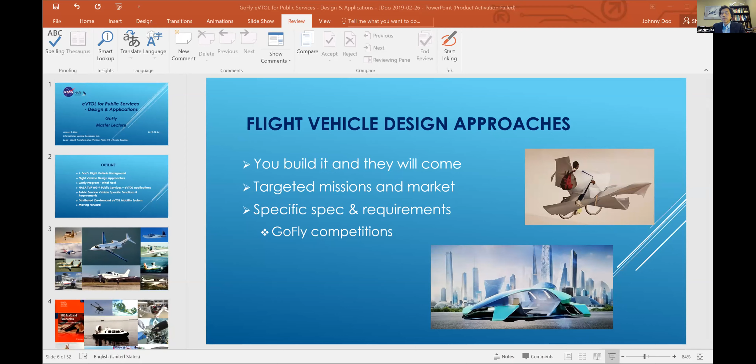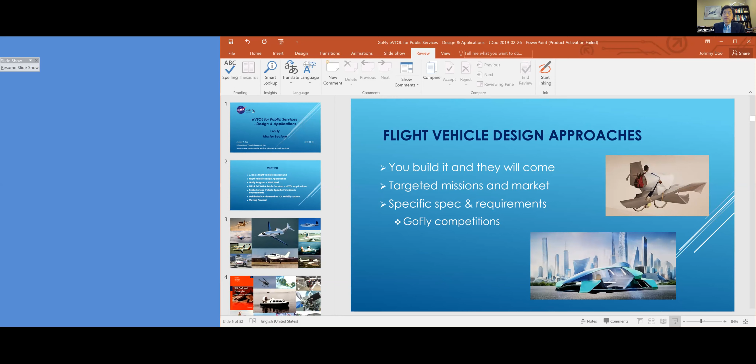And you guys can see the slide, okay? It looks like we're in presentation mode, Johnny, so if you'd like to switch it to full screen. On my side, it is full screen. Let me try another file, and put that on full screen. Not working? Almost there. Let's try full screen on this slide, and it should work. There we go. All right. Okay, yeah. All right, guys, and ladies.

Welcome. Today we're going to talk about the eVTOL for public services and design application. Appreciate the invitation, and I'm going to go through the slides a little bit quick. In case you have any questions, feel free to ask, and also feel free to contact me if you want certain specific details.

Let me quickly go through an outline. I'm going to talk a little bit about my vehicle background, thanks for the introduction already, and we're going to talk about the flight vehicle design approach, just a general approach, and what we're going to do with the Go Fly program. I'm sure there's a future program that probably follows, but you're already putting in a lot of effort that can be put to good use. I'm going to quickly introduce the NASA Transformative Vertical Flight Working Group for Public Services and its application. Then we get into public service vehicle specification, specific functions and requirements, and we can talk briefly about a distributed on-demand eVTOL mobility system concept. And finally, we'll briefly say what do we do moving forward.

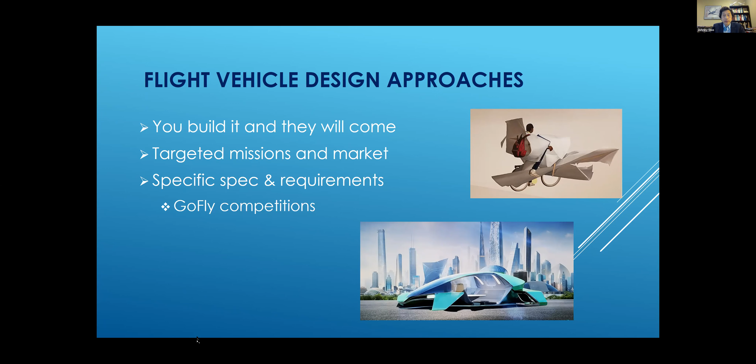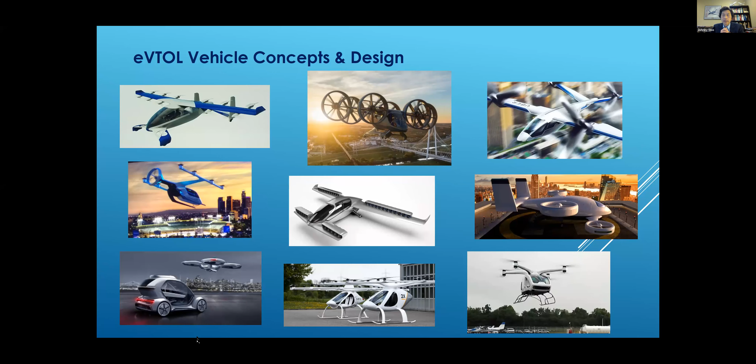Of course, we've all seen a lot of different designs, over 150, in addition to all the Go Fly projects that's ongoing right now. But they all have different features. It's very, very different. This is kind of breaking the tradition from the so-called conventional aircraft design, the fixed wing or the helicopter. Right now, everyone has different ideas for what will work best. And I'm sure there are many different ways to address the challenges and opportunities there.

And of course, seeing the Go Fly competition, I'm so excited about seeing this effort because I think this is the best way to get the best ideas out there. Not everyone is going to work the same way, but I think this is by far the most creative activity I've seen for a long time.

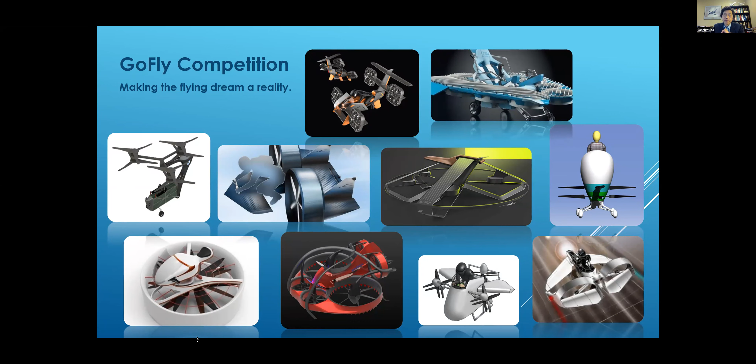Now, if we were to look at a more commercial aspect of the business, then we need to figure out what is the target market and what is the application of the platform.

Winning the competition is definitely the first step, but moving forward, they may have some commercial business thinking that will enable us to take the next step. And we need to be able to assess the market size, which not only dictates how many you can sell, but also what kind of production volume you may want to plan for.

Now, every product basically has some price sensitivity, but not to the same level. Certain missions, certain applications are very price sensitive, especially personal ownerships and so on, or commercial applications like air taxi. They're very, very price sensitive and operating cost sensitive.

But also, in addition, consider time to market. How fast do you have to get there? For some startups and newbies, we may have to get a foot in the door quickly and start showing what you can do. But certain other companies may take a different approach—they want to take a little bit more time to get a system more mature before introducing it to the public. And of course, the timing approach may be driven by financial expense, funding sequence, and so on.

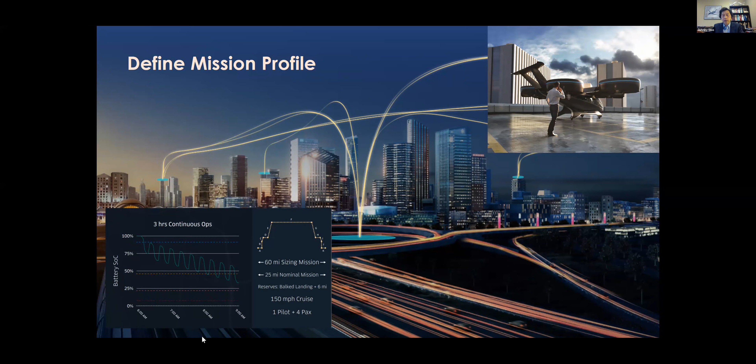There are many ways to develop a product. One is a scale prototype. It's too big and too expensive to start right off the bat designing a big airplane and building it. Sometimes a scale prototype makes a lot of sense. It is also important to develop subsystems, bench testing, integration onboard, and so on. That can a lot of times reduce your risk once you try to fly the real vehicle.

Do we do a technology demonstrator with a concept aircraft? That is a matter of choice, depending on the approach of the program. And sometimes you need a quick design, build, test approach, especially with a very new configuration or new technology—quickly put something together, learn about it safely. I want to emphasize that.

That may be a good approach. And of course, we know nowadays we all leverage computational tools—the CFD, the FEM structure, topology optimization, simulation.

By the time I get to the design program, in the old days, we do a lot of wind tunnel tests. We configure the airplane, different configurations, spend a lot of time with multiple tunnel entries to progressively narrow down the configuration. By the time we get to the design program, we're heavily dependent on CFD and structural analysis. By the time we get in the tunnel, we virtually have no changes.

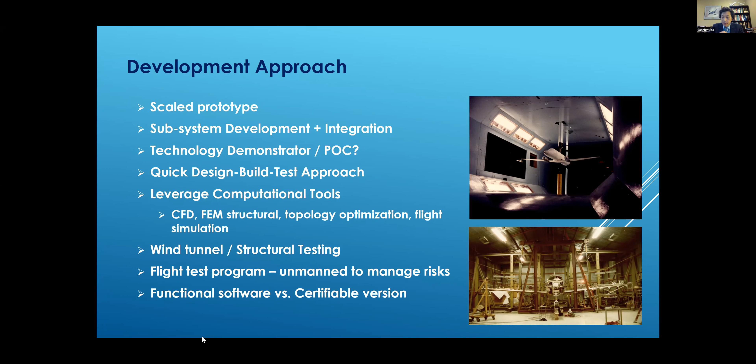It's a great way. Of course, we have to be aware that working software doesn't mean it's certifiable. That is a challenge, especially for eVTOL. So let's look into that further.

A lot of eVTOL programs were able to move so fast with so many different design configurations because we were able to leverage a lot of new technology coming on board. Of course, we have to do further development in order to fit that technology into the vehicle we're designing - power lift, transition, aero control, the lift propulsion system, motor control.

And rotor duct efficiency - do you want a duct? Do you not have a duct? Lift cruise balancing system - how do you balance between those two requirements?

Energy storage is a big challenge - the battery or other forms of fuel cells and other energy sources. It's challenging at this point, especially since today we're still more limited by the flight time. If it's all battery, how fast can you charge it?

So how do we establish industry standards, so that other different vehicles can be compatible and we don't have to fly somewhere and be unable to charge it?

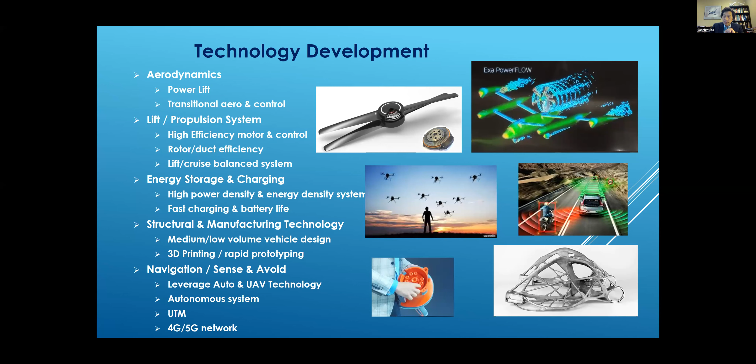Of course, 4G, 5G network - maybe 5G is all the buzzword nowadays, but 4G may still be quite needed, especially in outskirts and rural areas, since 4G has a range, unless 5G can extend that range and the data speed.

Some of the key design considerations: configuration, layout, payload, range, endurance, trade-off between hover and cruise, weight and balance, important. Noise, okay, it depends on where you use it.

If you use it in the farmland, maybe people care less about that. But in most cases, community noise is a big issue. Motor, propeller, fan is the source.

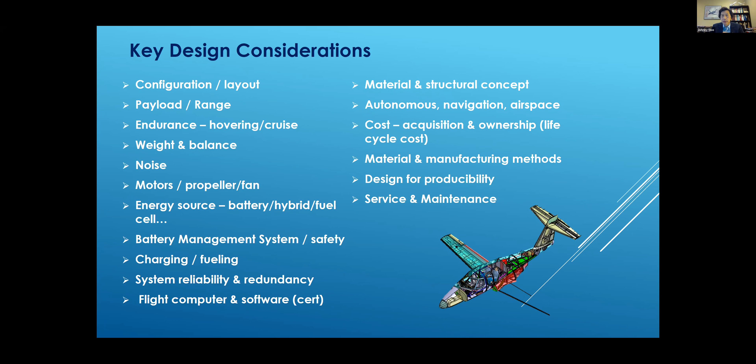airspace operations, cost - always a critical parameter - acquisition and ownership, lifecycle cost, material manufacturing methods, and design for producibility. That's part of the approach to keep the cost down. Service and maintenance, that's critical. If you ever go into commercial operation or government service, service and maintainability is huge.

Technology is a great thing that's enabled, but also poses some challenges on certification, because are they ready? How far have we gone? The new technology may be lacking existing cert data, so you may be developing the data from scratch, with time and cost implications. And supplier support - counting on the system being TSO'd, and then integrating it into the aircraft system.

And what's the means of compliance? Make sure that you leverage a lot of good work on eVTOL-related technology and subsystem standards from SAE and ASTM. FAA, EASA, Transport Canada, CAAC - what are the rules?

Different agencies have a little bit different approach, especially on eVTOL, because it's new. I'm sure over time it will harmonize again, but at the early stage we have a little bit different approach. We need to be aware of that. Not just vehicle type certification, but also operating cert approval. How about local laws and rules? It depends on what you use it for. So my point here is that certification will drive the design concept and details.

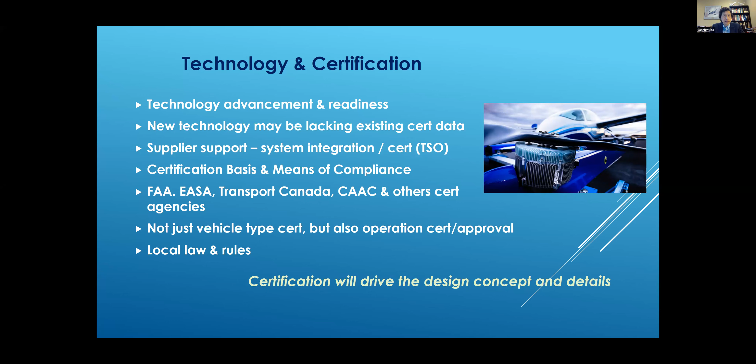One of the things I like to point out is weight and cost management. If you look at the chart on the left, that's a typical aircraft - the lower line is the actual database weight, and the upper line is predicted, estimated, and potential weight. Rarely have I ever seen an aircraft program where the aircraft comes in underweight. Most of the time you come in overweight. Over time, as you design and mature, and take certification requirements and maintenance operation into account, quite often the weight goes up, and you have to anticipate that and manage accordingly.

Of course, the right-hand chart is purposely blurred out so they don't see the data, but it's a way to track different build levels, different build stations - how much weight is in-house build versus supplier weight, and so on. What's all the cost to go with that? Cost adds up - that simple, well actually that's a lot of data on the subcaps and so on. But that kind of effort is helpful to start with, to have a simpler view, but have visibility on both the weight and cost to run a successful program.

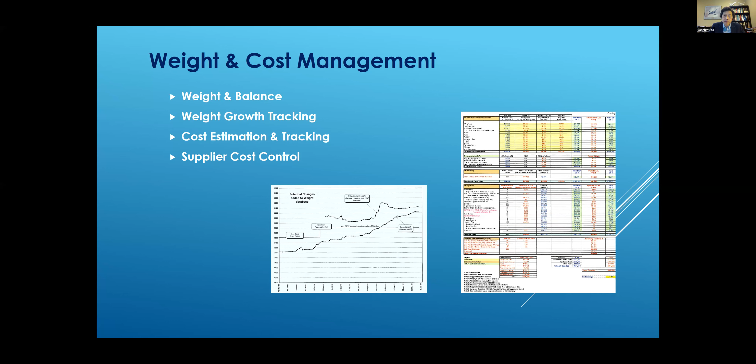Design for producibility - one of the things I brag about is, you have to figure out your design concept, what you want the airplane to do, how you want to build it, where you're going to build it. If you want multiple assembly sites, you may want to leverage more 3D printing. You can build more of the airplane locally and so on. There's many manufacturing technologies advancing fairly rapidly.

If you look at the left-hand side, that's one of the UAS wings that was printed. In the right-hand corner, we were able to print at pretty low cost, a 12 by 12 by 24 inch build volume. That becomes very useful, especially at the prototyping stage. You can use 3D printing to make tooling too. Sometimes tooling is a very long lead time item. Using 3D printing to produce tooling is a good way to accelerate the program.

First, you can machine it - high-speed machining is getting so good, and the cost is coming down more and more. Do you think we may have a challenge printing man-sized aircraft? Well, think again - the center picture is the Oak Ridge Research Lab.

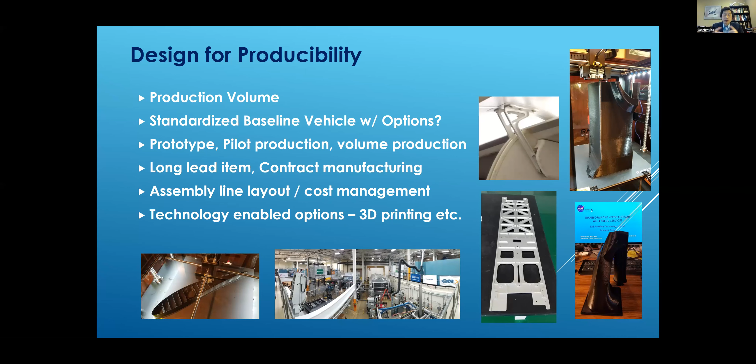One of the best things about 3D printing is the more you optimize it, the lower the cost, because quite often it goes by the volume of material you actually use, since it's additive. Traditionally, if we had to machine it out, we'd have to pocket out material every time, which costs extra money. But with 3D printing, the less material you need or use, the lower the cost and less the time.

So the GoFly program has many innovative designs and has been targeted for a set of requirements for the competition prize. The advantage is most of the team started to prove out the vehicle concept development, technology validation, and integration in a small envelope. I like that - easy transportation and other benefits - and validate the small vehicle concept configuration.

Where's the future application and market? If you were to take all the good work you put in and move forward - recreational personal transport: the vehicle is designed to be small, and that's pretty close to that kind of market opportunity. Or it could turn into an unmanned aircraft system to carry cargo, rescue, deliver life vests, life rafts, and so on - that's a possibility.

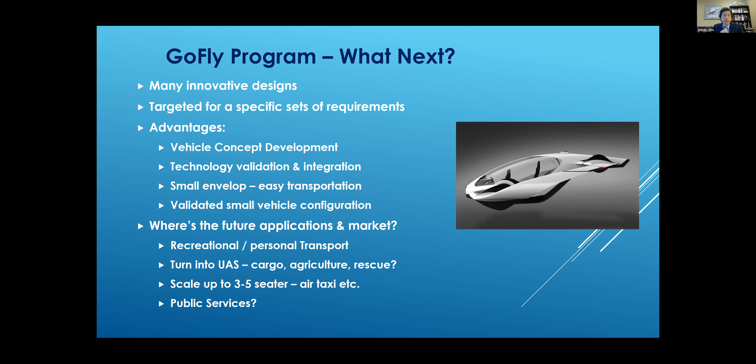Or we can scale it up to 3 to 5 seaters, maybe air taxi or other family sedan, eVTOL sedan. And of course, the last one, which is my point, is public service.

Based on that, I'm going to briefly introduce NASA's Transformative Vertical Lift Working Group. We have 4 working groups. Group 1 is private recreational vehicles, short range. Working Group 2 is commercial intracity, short range. Group 3 is commercial intercity, longer range. And Group 4 is public service.

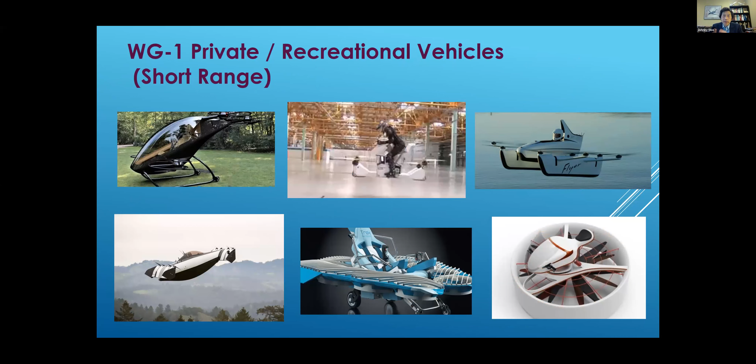This is the type of vehicle we're talking about for Working Group 1 - more people are familiar with this already. Working Group 2, basically, we're talking about the air taxi type or many other intracity potential applications.

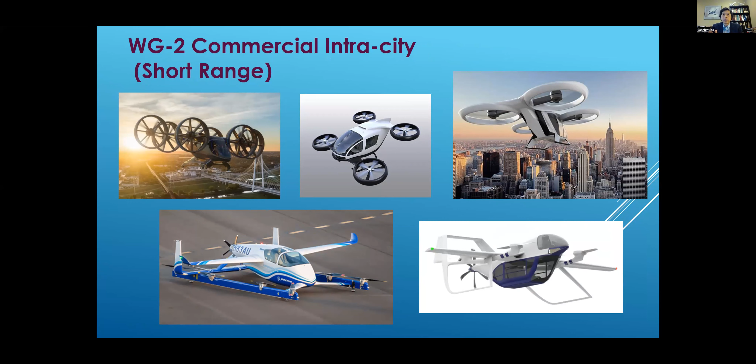To do that, in Uber's proposal you need a network of vertiports in order to be able to operate, otherwise where are you going to land in the city. Of course, if you go to the suburban areas, you may have other options and possibilities.

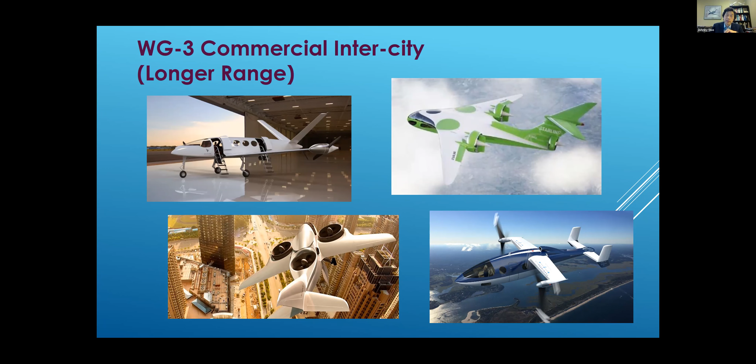Working Group 3 is basically commercial intercity - some are horizontal conventional takeoff, some are vertical takeoff, and so on. Pretty interesting. And Working Group 4 is public services, which actually covers Working Groups 1, 2, and 3.

But we focus on what we can do to put this to use for public services. The mission elements we cover include search and rescue, law enforcement, firefighting, medical transport, emergency humanitarian response, and military operations. There are some pretty aggressive targets that we're going to push to see whether we can make that happen.

For law enforcement, the world is changing - sometimes even chaotic. But law enforcement does a lot more than just security issues, and there are all kinds of situations to support. So eVTOL can be a huge enhancement in capability in this area.

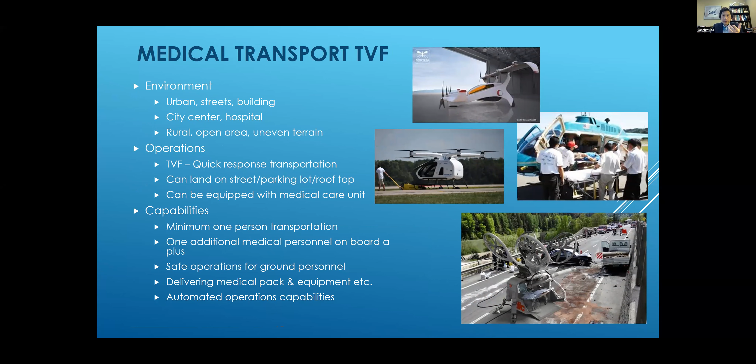Of course, medical transport - if somebody got hurt even on the roadway, a transport device can take the patient quickly to the hospital. And if we can stay within that golden hour, we can save a lot of lives.

Of course, emergency humanitarian response - we all know that quite often we lack last mile capability. A lot of times we were able to get supplies to a staging area, nearby airports, harbors, but we couldn't get to the survivors. eVTOL is an excellent platform to bridge that last mile function requirement.

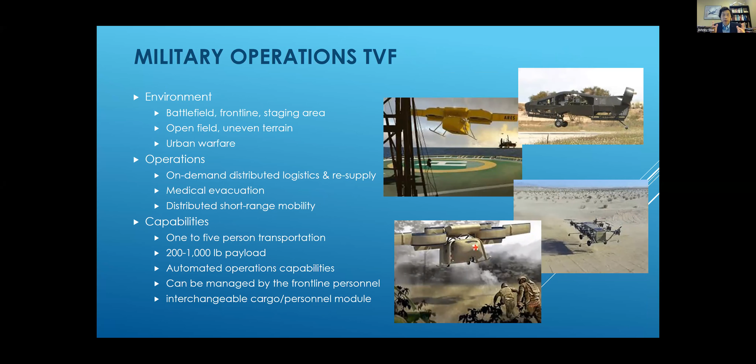Of course, military has all kinds of possible applications for it. We've talked to some folks in DoD many times. Two very, very interesting applications where eVTOL can do an excellent job: one is the resupply mission, the other is medical evac. And then, of course, there are all kinds of other potential applications.

As I said, quite often in disaster areas, it's challenging to be able to get in and out. The last mile, the roadblocks, earthquake, fire, flood - eVTOL can make a huge difference.

Here's what we came up with as a multi-purpose public service transformative vertical flight vehicle spec. This is high level, but on the right-hand side are some of the basic features. We'd like to have modular payload pods, land on water, perhaps optionally, and uneven terrain.

You come into a disaster area, you don't necessarily have nice flat ground for you to land. A compact operating footprint, transportable on regular roads - got to get them over there, right? If it's a huge airplane that doesn't fold, that can be difficult if people have limited range.

Fail-safe critical systems, 4G, 5G data link, beyond visual line of sight vehicle communication - depends on where we use it for public use, different kinds of service requirements and so on. But level 1, level 2, different performance spec requirements. We didn't put on an extremely challenging one, but this is the spec capability I think we can achieve today or within a year or two.

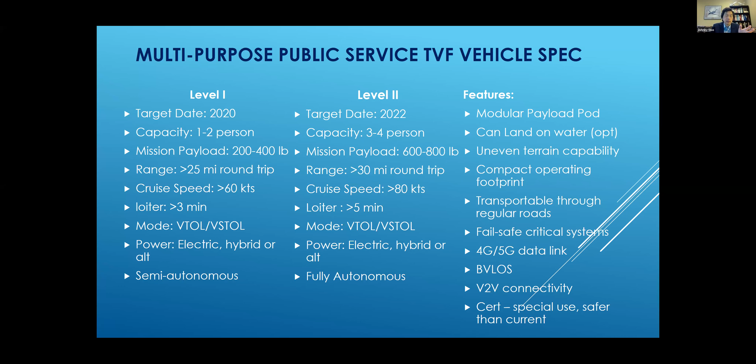Depends on whether it's medical transportation, emergency medical care delivery, firefighting transport, water rescue, and other specific missions - we need to tailor the design for that mission to do that mission best.

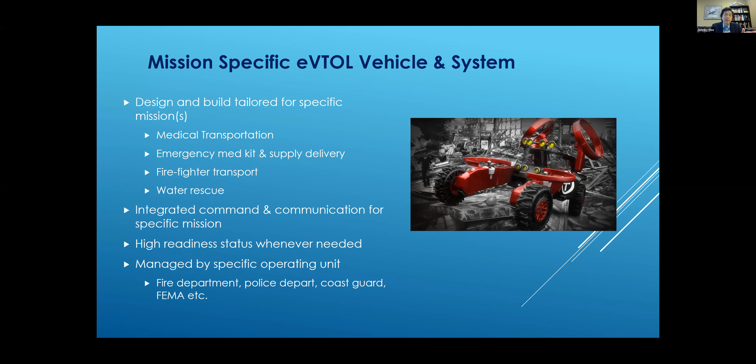And just as an example, in firefighting, look at it - it's heavy. We need to have coordinated command and communication. How do we transport it to the staging area? Heavy smoke, beyond visual line of sight, high temperature.

Sometimes the fire can generate very hot air, turbulence, stability - all challenging. We generate strong wind, steep terrain - how do you land and take off? Fire-induced turbulence, as I said, and the special equipment the firefighter needs to carry with them.

And other design considerations - I'm not going to go through the detail. Do we have floats and so on? For example, we need to probably fit into a 20-foot cargo container.

Then we can transport it not just for deployment, but also have the ability to transport to other places and ship to worldwide locations. And if it can fit into a C-130, many units into one C-130, that we can get into disaster areas.

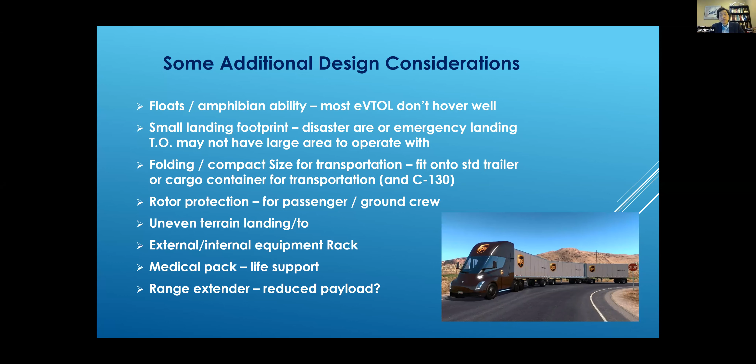And of course, operational challenges and solutions. What happens if we don't have enough mission-specific units, like for civilian evacuation? I don't think we can have dozens or hundreds of platforms ready, just everywhere standing by. But we can build it into the current flight operation, commercial business, private ownership, and so on.

We can draft it, with clear arrangements, and put them to good use when we need to. We can pay according to prearranged usage rates and provide tax and public incentives for participants. So that could be a complementary method to have both specific-design tailored public use vehicles and general-purpose public use vehicles.

And of course, local infrastructure can be a challenge, especially if you're flying to rural areas and so on. How do you get there?

And of course, there are some potential operators - I'm not going to read through the detail. Those are the potential operators for law enforcement and search and rescue, National Guard, and so on, along with National Park Services and firefighting operations.

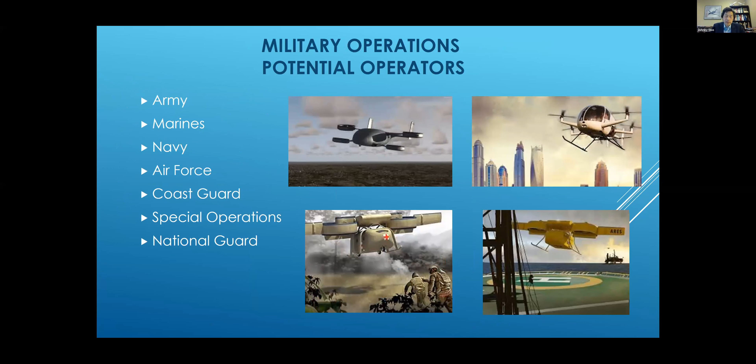Office of Wildland Fire, for example, and medical transport - hospitals, fire departments, EMS, and emergency humanitarian response across FEMA - potentially a big user for this. And of course, militaries around the world have different good uses for it.

A near-term application - I think rescue, firefighting, and disaster relief will be near-term usable opportunities.

I'm proposing a distributed, on-demand eVTOL search and rescue, disaster relief operation network. We said earlier, we embed the vehicle and encourage OEMs to design platforms that can be used not only for other purposes, but also deployed in emergencies.

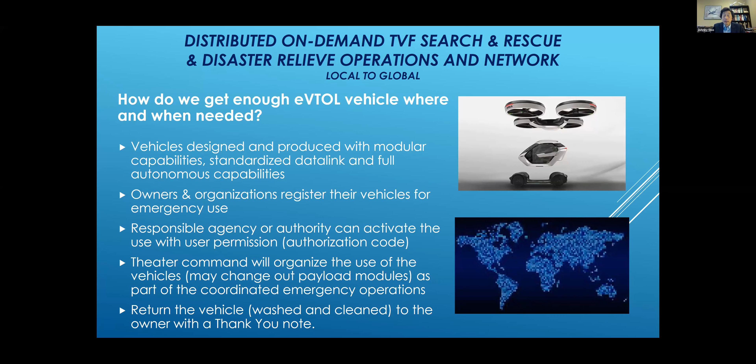If we have an earthquake, nearby cities can help. Example of Houston - Harvey flooded big time, never expected that. But if we have a whole bunch of air taxi, eVTOL, and personal use recreational ones capable and suitable for helping people in the Houston area, we can fly them one stop, perhaps from Austin, San Antonio, even Louisiana, to the Houston area, and give it to the theater commander. He has control of the situation, control of the vehicle, control of the airspace.

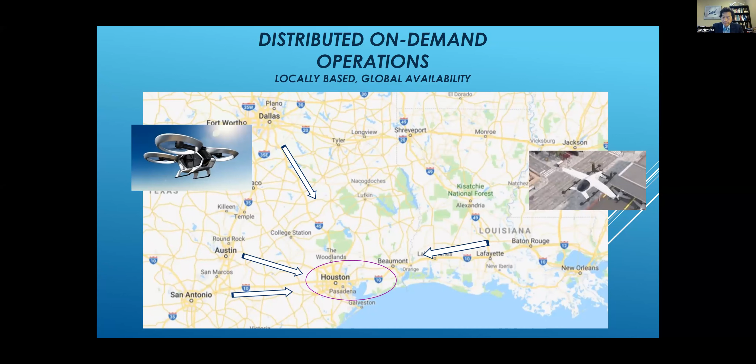Of course there's challenges to design that. Are they going to be the right configuration, functionality, capability? Is the flight software and communication system able to fit into command operations? Can the seat be removed or put flat so we can get patients in there? How willing are people going to participate? And range limitation, transportation requirements, and so on. But I think those are challenges we can overcome by design, by specific consideration.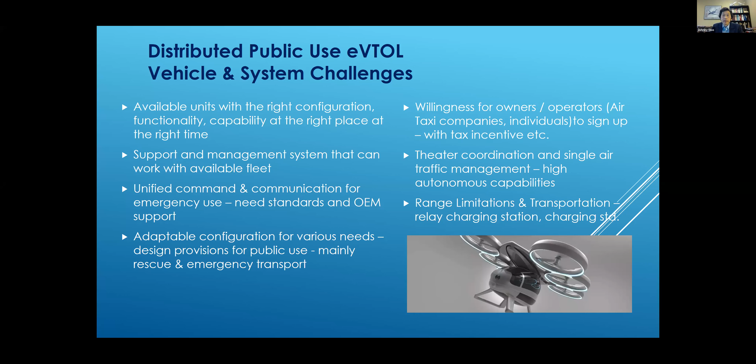Communication is key, but Canadian companies are very good at building floats, and there's a couple other companies in the world as well. We can fit a set of floats, normally stored in a warehouse, and when we need it, attach it to the flight vehicle. Now we can land in the water because eVTOLs generally don't hover well or have long endurance. We can land in the water, get people on board, then fly away, so we don't have to hover like a helicopter. We can complement different mission modes compared to the current system.

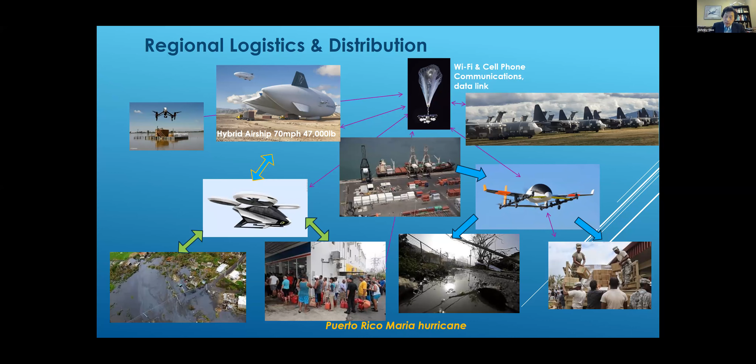That may be a way to get regional logistics, putting our eVTOL in the C-130 to get to the local regions we need. If we really want to think out of the box, here's a global logistics idea: if Boeing would reactivate their wing-in-ground-effect concept, which can carry 1,400 tons of cargo and go 10,000 miles, we could fit fast helicopters, even C-130s, on top of it, and get into the theater as an operating base. That's a flying carrier. It may take a little while before that happens, but the concept's there.

That's what we can do, within 24-hour response time to get to everybody.

Moving forward - eVTOL for public service applications, providing the last mile of mobility, will make a significant difference, even with conservative capability to start with. We need general purpose and mission-specific units and support systems to be effective in various situations. We can really leverage GoFly's global effort - this is truly a global effort - to accelerate the development of practical vehicles and systems. We've made huge progress already; let's leverage that. Only a demonstrator and a few tests are essential for long-term mass deployment. The public service mission can help with positive public opinion and pave the way for wide range use and market.